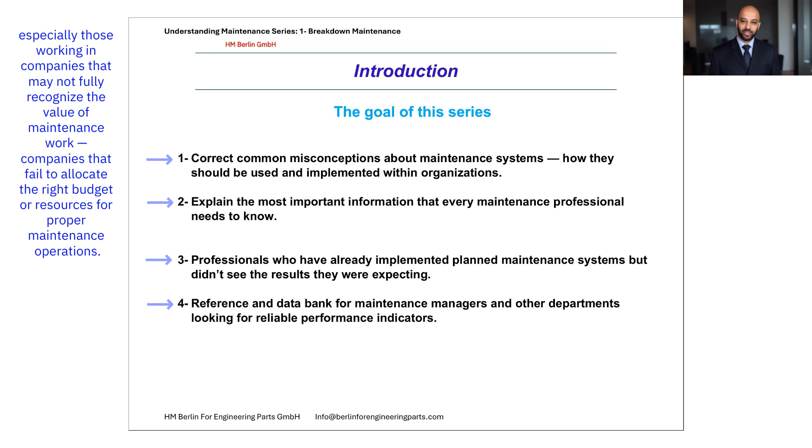This series is also designed for professionals who have already implemented planned maintenance systems but didn't see the results they were expecting, whether in terms of equipment performance, technical KPIs, or in terms of cost reduction, financial KPIs. Finally, this series will serve as a reference and data bank for maintenance managers and other departments looking for reliable performance indicators to measure and compare their actual maintenance results, and use that data to drive real improvement.

Now, let's take a closer look at the definition of breakdown maintenance, a term that many people use but often misunderstand. Definition 1. The practical perspective. A simple and practical definition of breakdown maintenance is this: it's the work you're doing today that you didn't plan to do at least a week ago. In other words, it's unexpected. Something broke down and now you're forced to fix it, whether you like it or not.

Definition 2. The operational view. Breakdown maintenance can also be defined as all maintenance activities that are not scheduled in advance and are only performed when equipment fails. This includes emergency repairs, urgent part replacements, and any unplanned interventions triggered by equipment failure. Definition 3. The technical description. From a technical standpoint, breakdown maintenance is maintenance that is carried out on equipment that has stopped working, experienced a fault, or can no longer operate within its expected limits. In short, the machine is down, and the goal now is to get it back up and running as fast as possible.

Summary. While the wording may vary, all these definitions point to the same core idea: breakdown maintenance is reactive. It happens after something goes wrong, and it often leads to high costs, production delays, and stress on both the equipment and the maintenance team. That's why it's important to understand it deeply, measure its impact, and, when possible, reduce our dependence on it.

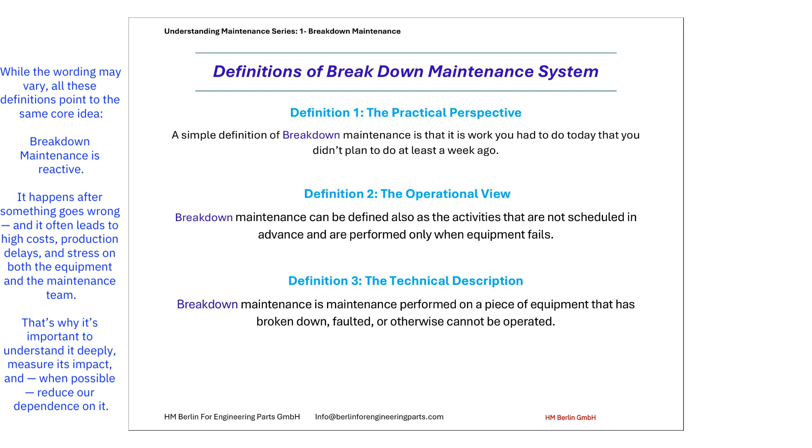In the previous episode, we explained that maintenance systems are generally divided into two main categories: planned maintenance system and unplanned maintenance system. As we explained, the unplanned maintenance system is referred to as breakdown maintenance system, although it has several names that differ according to the classification of the type of part, whether mechanical or electrical, and the country and organization, as we will review them all in this episode.

Now, when we say maintenance system, it means that there are tasks, execution methods, and performance standards, even for unplanned maintenance system. Unfortunately, many people wrongly assume that unplanned maintenance simply means that the maintenance team will be waiting until a part or asset fails and then fixing it. That is not accurate. Before we correct that misunderstanding, let's first highlight a few key points about why unplanned maintenance system is important. 1. It is the foundation of all planned maintenance systems. Without first improving how unplanned maintenance is managed, no maintenance manager will ever be able to achieve the full potential of planned systems, especially in terms of equipment efficiency or technical performance.

This is one of the biggest challenges maintenance departments face when trying to improve their preventive maintenance results. 2. Based on global statistics, unplanned maintenance still accounts for 40% to 55% of total maintenance activities worldwide, even in organizations that already apply preventive maintenance systems. This shows how common and essential it still is.

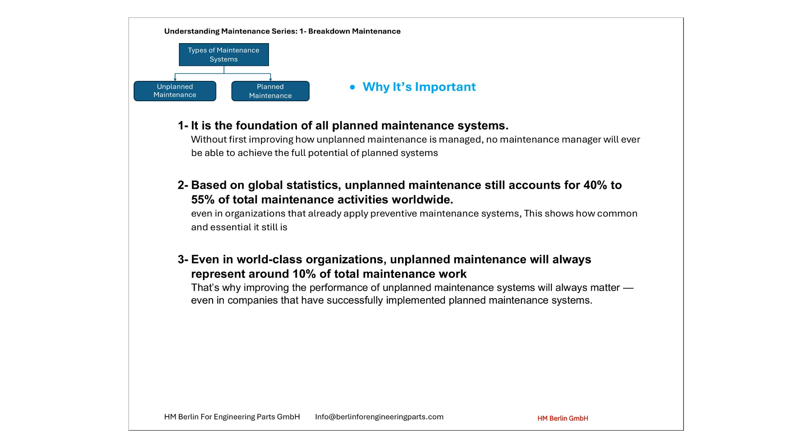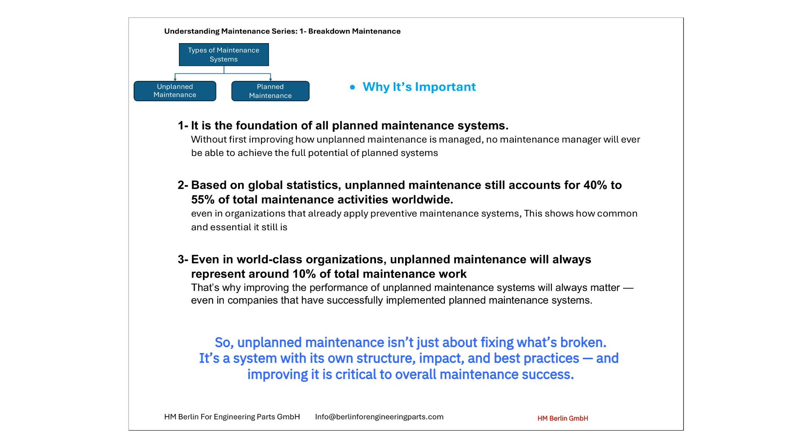3. Even in world-class organizations, unplanned maintenance will always represent around 10% of total maintenance work. That's why improving the performance of unplanned maintenance systems will always matter, even in companies that have successfully implemented planned maintenance systems. So, unplanned maintenance isn't just about fixing what's broken. It's a system with its own structure, impact, and best practices, and improving it is critical to overall maintenance success.

Now, let's talk about the different terms used for unplanned maintenance. You might hear different names depending on the industry, the company, or even the country, but they all refer to maintenance that is not planned in advance. The first term is breakdown maintenance. This happens when a machine or system suddenly stops working, and we only fix it after it breaks down. It's the most basic form of unplanned maintenance, and often the most disruptive.

Second term is run to failure, RTF. This is a strategy where we intentionally allow a machine to run until it completely fails. It sounds risky, but it's sometimes used for non-critical equipment where the cost of planning maintenance is higher than just fixing it when it breaks, and in the electrical parts that consist of electronic parts, which will be explained in the next episodes with proactive maintenance.

The third term is reactive maintenance. This term is used when we respond after a failure happens. It's like calling the mechanic only when your car stops on the road, no prevention, just reaction.

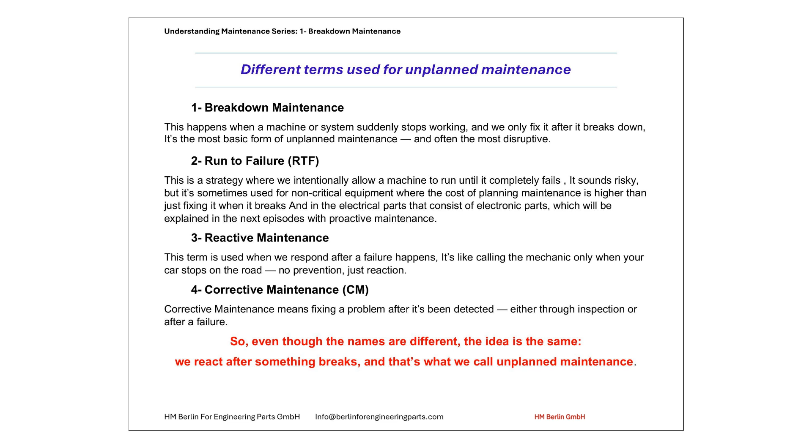Fourth term is corrective maintenance, CM. Corrective maintenance means fixing a problem after it's been detected, either through inspection or after a failure. It can be planned or unplanned, depending on how early we catch the issue. But in many cases, especially in small factories, it's done only after something goes wrong, which makes it unplanned. So, even though the names are different, the idea is the same. We react after something breaks, and that's what we call unplanned maintenance.

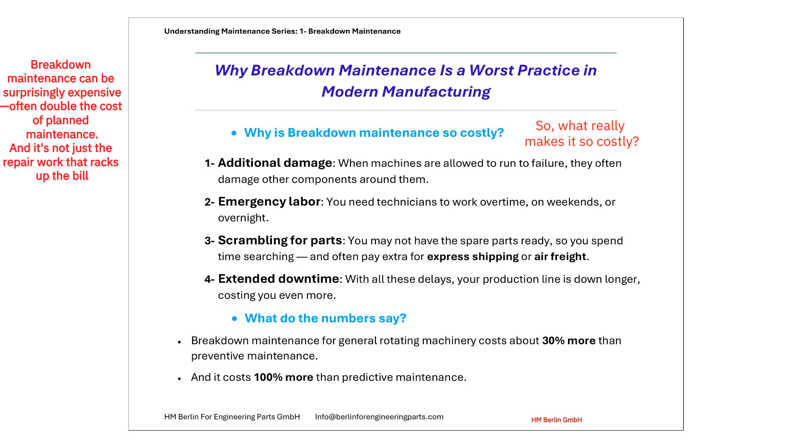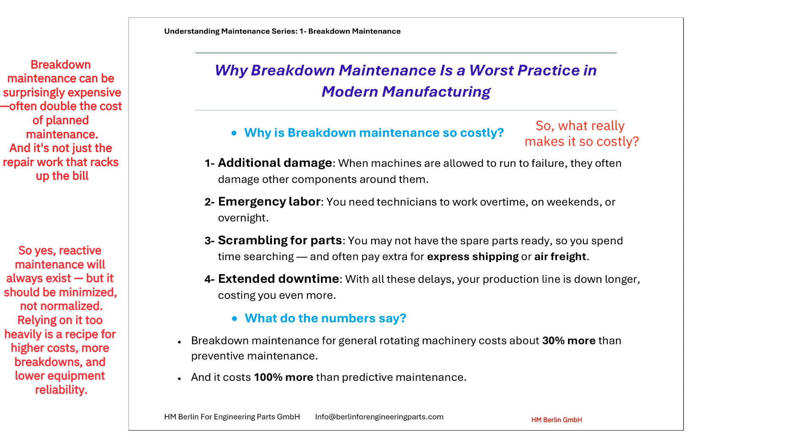What do the numbers say? Based on practical experience and international studies, one reactive maintenance for general rotating machinery costs about 30% more than preventive maintenance. 2. And it costs 100% more than predictive maintenance. So yes, reactive maintenance will always exist, but it should be minimized, not normalized. Relying on it too heavily is a recipe for higher costs, more breakdowns, and lower equipment reliability.

How much of your maintenance is unplanned? Now let me ask you a direct question.

What percentage of your maintenance work is unplanned in your organization? Take a moment to think about it. Are your maintenance activities mostly planned in advance? Or is your team constantly reacting to failures, breakdowns, and emergencies?

If more than 20 to 30% of your maintenance is unplanned, you're likely operating in a reactive mode. And as we've already discussed, that's costly and unsustainable in the long run. So how do you know exactly where you stand? In the next paragraph, we will learn how to calculate the percentage of unplanned maintenance.

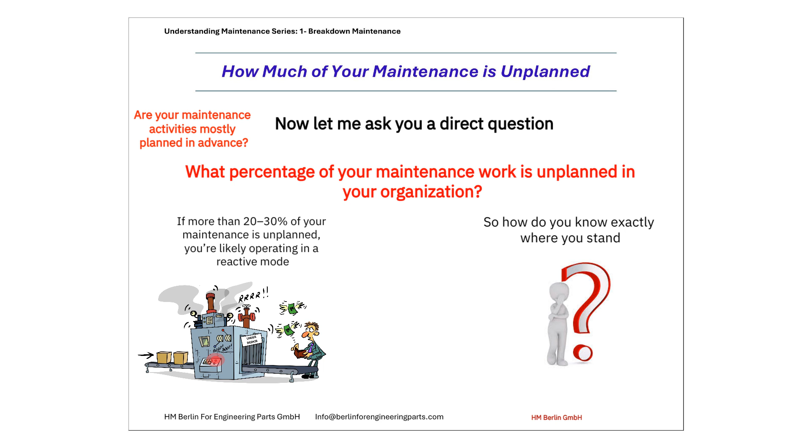Now let's calculate it. As we agreed, any maintenance task performed today that was not scheduled at least 1 week ago is considered unplanned maintenance. This definition gives you a clear line between planned and unplanned work, and it's practical, measurable, and actionable.

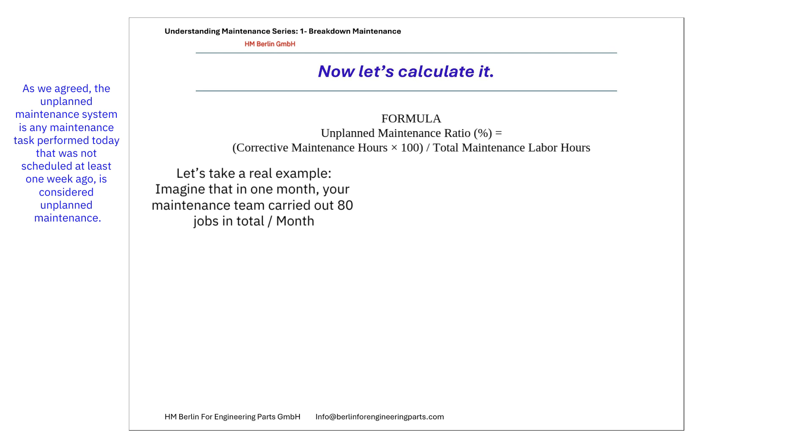Here's a simple formula you can use. Unplanned maintenance ratio % equals corrective maintenance hours times 100 divided by total maintenance hours. Let's take a real example. Imagine that in 1 month, your maintenance team carried out 80 jobs in total. Out of these, 30 were unplanned, meaning they were not scheduled at least 1 week in advance.

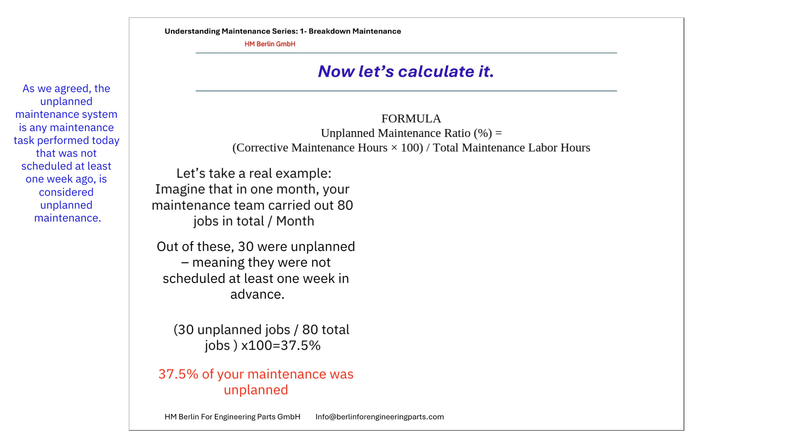Now plug that into the formula. 30 unplanned jobs divided by 80 total jobs, multiplied by 100, equals 37.5%. That means 37.5% of your maintenance was unplanned, and that's higher than the recommended range.

According to best practices from leading global manufacturers, your unplanned maintenance rate should ideally be under 10%. Above 30%, you're definitely in the red zone. But don't worry, you are not alone. Did you know that most organizations, based on statistics, suffer from an increase in the rate of unplanned maintenance?

Conclusion. So, if you're not already tracking your unplanned maintenance ratio, start today, because you can't improve what you don't measure. Why is your unplanned maintenance rate so high? Causes behind reactive maintenance dominance.

Let's now talk about a critical question. Why is the percentage of unplanned maintenance still high in many organizations, far beyond global benchmarks? Well, in most cases, the reasons are actually beyond the control of the maintenance manager. Many maintenance leaders find themselves stuck between two forces.

1. Upper management that doesn't approve budgets for preventive tasks, inspections, or routine overhauls. 2. And production departments that won't release machines for planned maintenance at the right time.

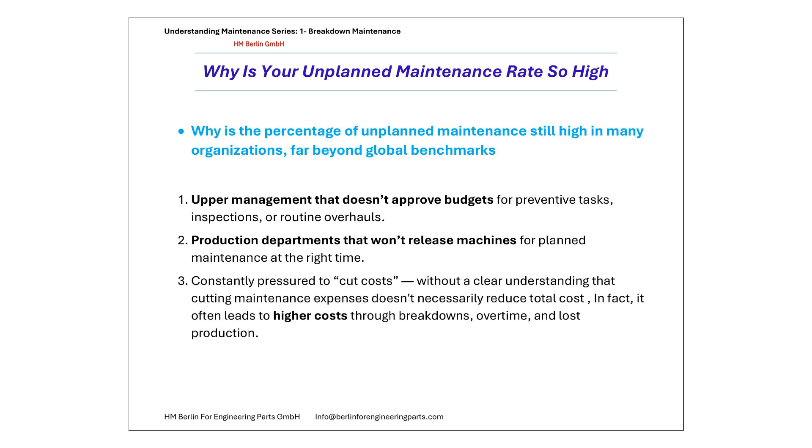3. At the same time, these managers are constantly pressured to cut costs, without a clear understanding that cutting maintenance expenses doesn't necessarily reduce total cost. In fact, it often leads to higher costs through breakdowns, overtime, and lost production.

Common challenges maintenance teams face. 1. Lack of awareness at the executive level of the real financial losses caused by equipment breakdowns. 2. Inability of production planners to allocate dedicated downtime windows for inspections or preventive maintenance.

3. Use of cheap spare parts based on the false assumption that this will reduce maintenance costs, while in fact, it often causes repeat failures and more unplanned downtime.

4. Upper management prioritizing short-term savings over long-term reliability, always choosing to delay or cancel preventive work to save money, not realizing this usually increases total cost through reactive work and system inefficiencies. 5. Frequent breakdowns caused by poor operating practices, such as misuse or overloading of equipment by production staff.

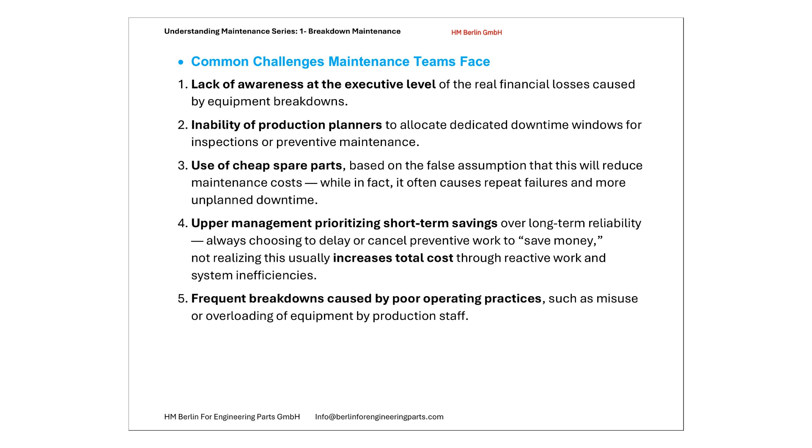The result: even the most experienced maintenance professionals struggle to implement effective preventive strategies, not because they lack knowledge or skills, but because the system around them is not enabling success. So if you're a maintenance leader, remember, success depends not only on what you do, but also on how your organization supports what you do.

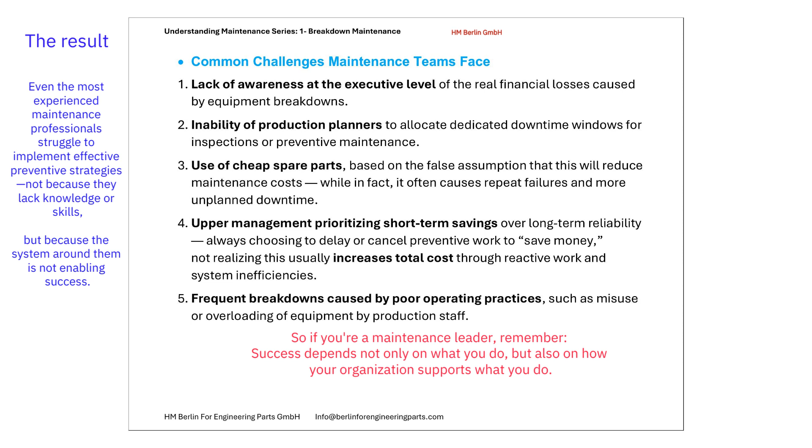So, your unplanned maintenance is too high. Now what? All right. So now you've done the math. You've calculated your unplanned maintenance percentage, and it turned out to be much higher than the global average, whether it's 40%, 50%, or even more. You're definitely not alone. Many maintenance departments across industries face the same challenge.

Now you might be wondering, is it even possible to eliminate unplanned maintenance? If you cannot access the preventive maintenance system, the honest answer: no, but I will tell you how to improve your team performance. In fact, even in world-class plants, unplanned maintenance still makes up around 10% of total maintenance activity.

So the real question isn't how to get rid of it. The question is, how can you improve the way you manage it? That's what we're going to focus on.

In the next part, I'll walk you through how to improve your unplanned maintenance, starting with enhancing one key performance indicator that will help you reduce response times and streamline your internal processes. These aren't just concepts. They are proven practices I've seen work on the ground, and they can help you too.

Understanding MTTR and MTBF in maintenance performance. In any industrial maintenance system, two key performance indicators help assess equipment reliability and the effectiveness of the maintenance strategy: MTTR, mean time to repair, and MTBF, mean time between failures. MTTR is the average time required to diagnose, repair, and return equipment to operational condition after a failure. A lower MTTR means faster recovery from breakdowns, which helps reduce downtime and maintain production flow.

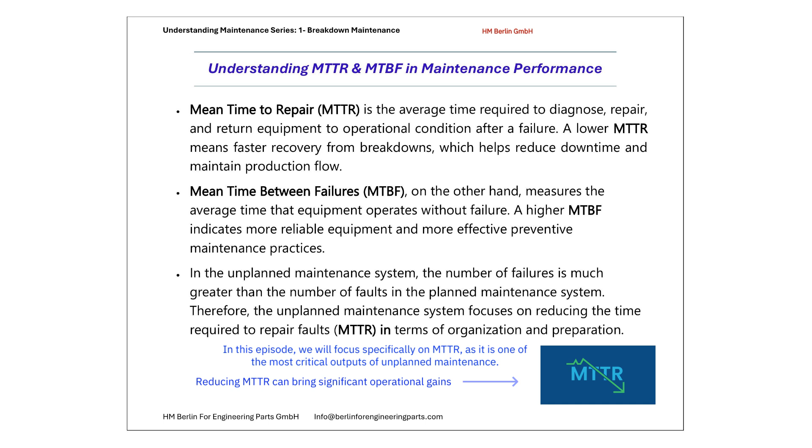In this episode, we will focus specifically on MTTR, as it is one of the most critical outputs of unplanned maintenance. Reducing MTTR can bring significant operational gains. Even if failures can't be entirely avoided, a fast and efficient response can keep the production line moving. Together, MTTR and MTBF provide a powerful insight into both equipment health and maintenance team performance, and improving these numbers is the foundation of any high-performing maintenance strategy.

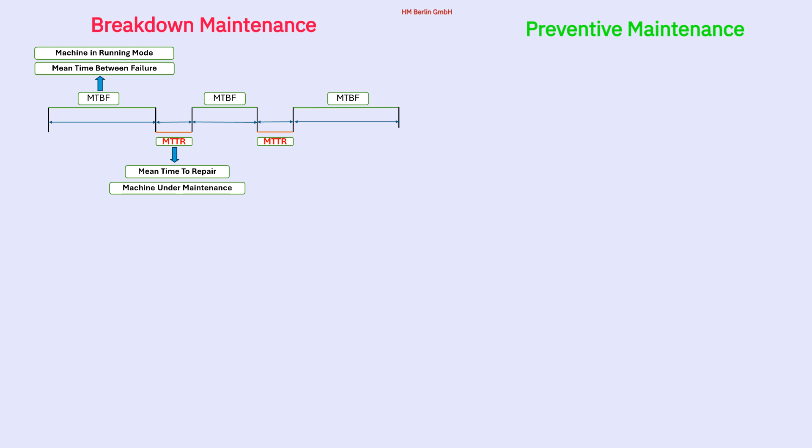Here I am showing two charts that compare two different maintenance strategies: breakdown maintenance versus preventive maintenance. In the first chart, which represents unplanned or reactive maintenance, we can see that the number of breakdowns is high. This means the MTTR, mean time to repair, is also high because the machines stop frequently and take time to repair. At the same time, the MTBF, mean time between failures, is low because the time between each failure is short. It's like a heart monitor showing irregular and weak pulses. The system is unstable.

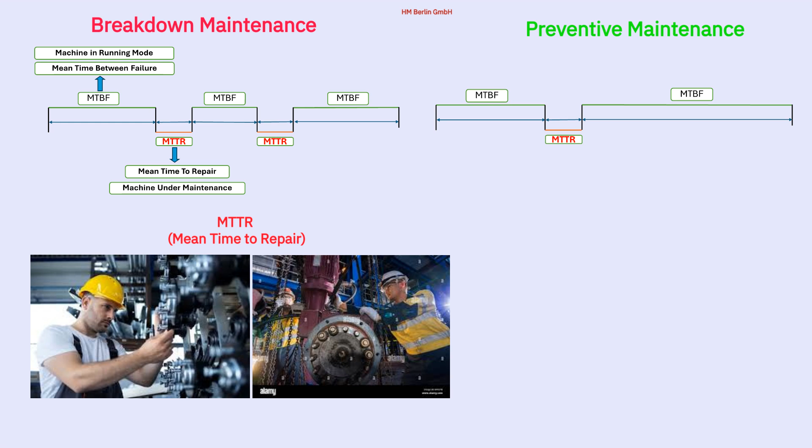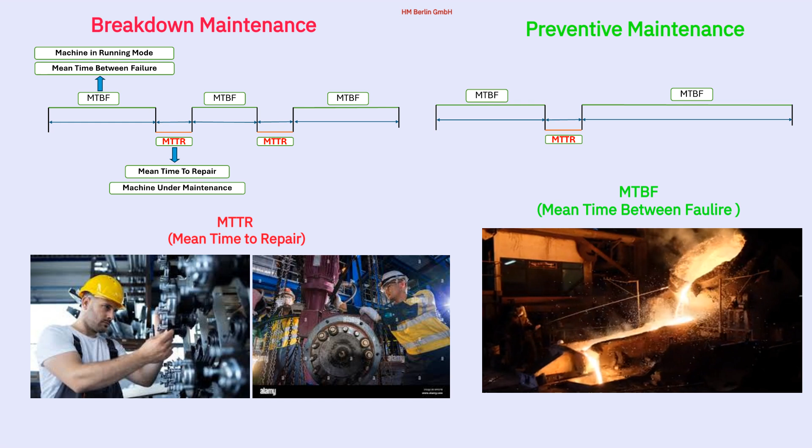In the second chart, which represents a preventive maintenance system, the breakdowns are fewer. This results in a lower MTTR and a higher MTBF, meaning the machines run for longer periods without failure. The system is more stable, like a steady and healthy heartbeat. So the goal is clear. By shifting from unplanned maintenance to preventive maintenance, we can increase machine uptime, reduce downtime, and improve overall production stability.

How to improve unplanned maintenance performance: real-world practices. Now let's talk about real solutions. If your unplanned maintenance rate is too high, you might not be able to eliminate it, but you can make it faster, more efficient, and smarter. Based on real factory floor experience, here are practical steps you can apply immediately.

1. Emergency toolkit ready and mobile. One of the biggest time wasters during breakdowns: technicians running around looking for the right tools. Solution: keep a pre-packed, mobile emergency toolkit with all standard tools, testers, etc. Check it daily. Assign responsibility. Make it non-negotiable.

2. Track recurring failures. Act on the data. Look at your breakdown history over the past 3 to 6 months. What's coming up again and again? Once identified, train your team to diagnose and repair these quickly. Even better, prepare checklists and spare part kits just for them.

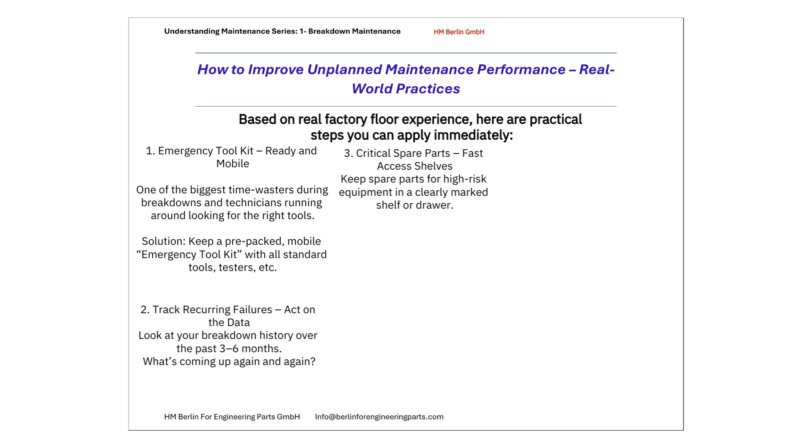3. Critical spare parts, fast access shelves. Keep spare parts for high-risk equipment in a clearly marked shelf or drawer. Use color codes if needed. No more searching, no more store delays.

4. Rapid notification channels. Don't rely on slow paper work orders for emergencies. Set up a WhatsApp group, radio channel, or even a Google form for instant fault reporting. Simple beats perfect. Speed matters more.

5. Pre-assigned roles during each shift. Each shift should have a clearly assigned first responder, the technician who jumps on the issue immediately. Others follow with tools, parts, or assist. No confusion. No debates. Just action.

6. Stronger coordination with production. Many delays happen because the maintenance team can't get access to the machine.

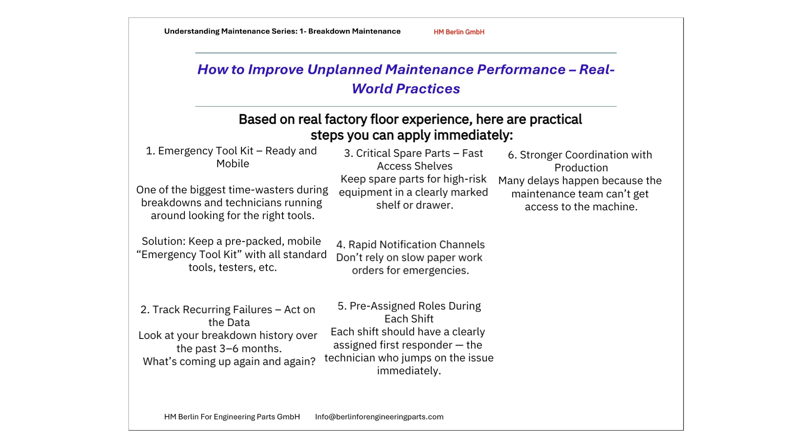Set a clear protocol with production. When a fault is reported, the equipment must be handed over quickly and safely, even if it means minor production delay.

7. Document every breakdown and review weekly. After every repair, document what happened, even in bullet points. Then spend 15 minutes each week as a team reviewing the top 3 breakdowns. What went wrong? What could have been done faster? It builds team awareness and skill. One factory I worked with saved 17% of their average MTTR using this simple practice.

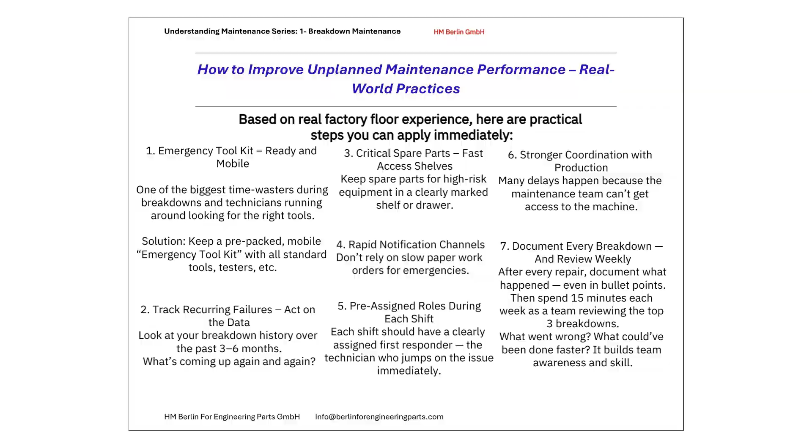Remember, the purpose of any maintenance system, old or modern, is to increase uptime and reduce repair time. And while planned maintenance is ideal, unplanned maintenance will always exist. Now that we've explained MTTR, MTBF, and discussed the 7 key points to reduce repair time, let's see how these same principles transformed one of the fastest-paced industries in the world, Formula One.

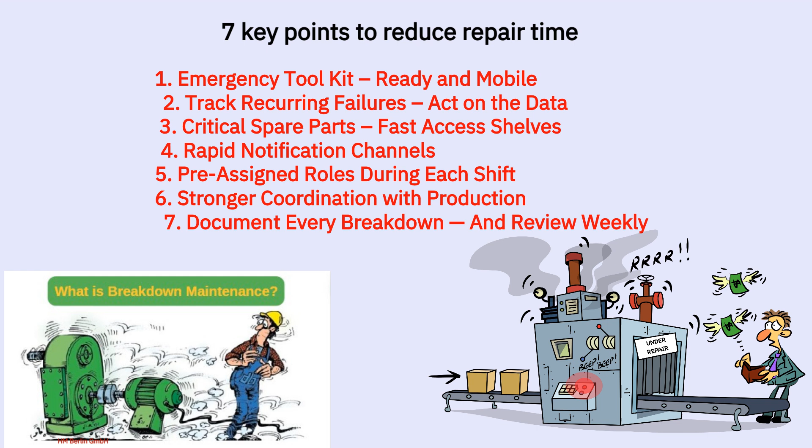Let's look at this real-life example from Formula One. What you're seeing here is a pit stop. The team is changing the car's tires in just a few seconds during a live race. In this video, we'll explore how reducing repair time, MTTR, isn't just about speed, it's about structure. You're now watching the evolution of Formula One pit stops, a real-world example of how planning and teamwork reduce downtime.

In 1957, a tire change could take over 60 seconds. By the 1980s, it dropped to about 25 seconds. In the 1990s, it fell again, around 8 seconds. By 2000, pit crews brought it down to under 4 seconds. Today, top teams complete a full tire change in under 2.5 seconds. This wasn't magic, it was process.

What changed over time was toolkits became optimized and mobile tasks were tracked and reviewed after every race. Spare parts were ready and accessible. Instant communication systems were used. Team members had clearly assigned roles. And everyone practiced, again and again. The same 7 principles you just saw.

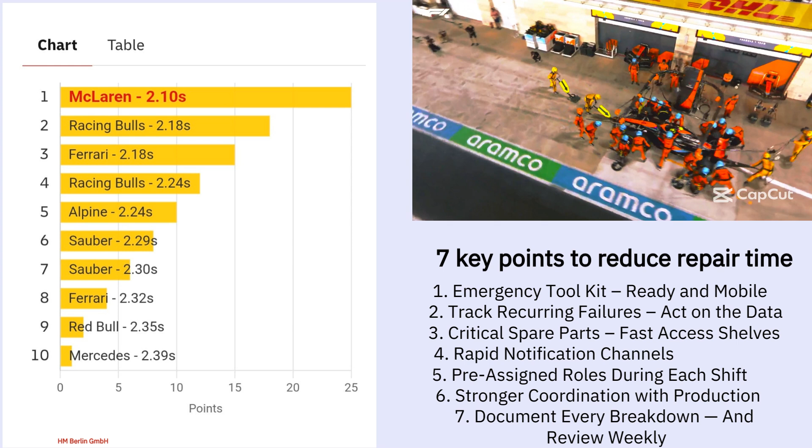This is not random. It's the result of extreme preparation, clear role assignment, tools ready in place, standard procedures, and perfect team coordination, exactly the same principles we discuss. In maintenance, we may not work on a racing track, but the concept is the same. If we want to reduce MTTR, we need to act like a Formula One pit crew.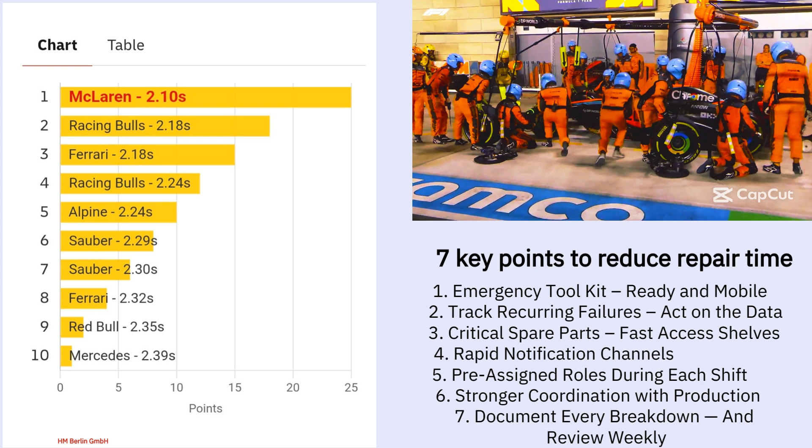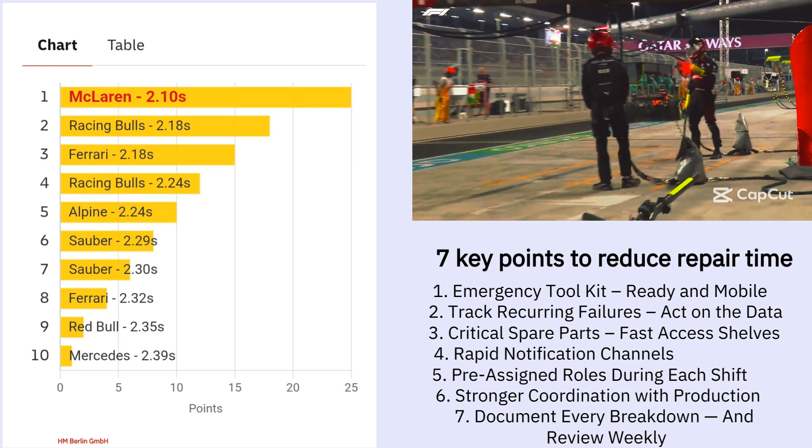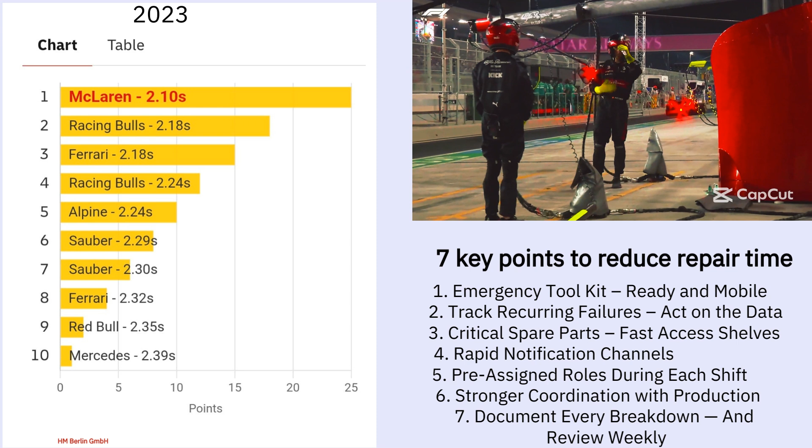Everything must be ready before the failure happens. Everyone must know what to do without delay. That's how you win races in Formula One, and that's how you win time and money in production. In both Formula One and factory maintenance, every second counts. A fast, organized response reduces downtime, saves money, and sets top-performing teams apart from the rest.

In conclusion, I would like to emphasize the following points. 1. Unplanned maintenance is a system in which the maintenance department is responsible for reducing repair time by developing plans, rather than waiting for breakdowns to occur, as is commonly believed. 2. Planned maintenance systems will remain in place regardless of the level of maintenance implemented by organizations.

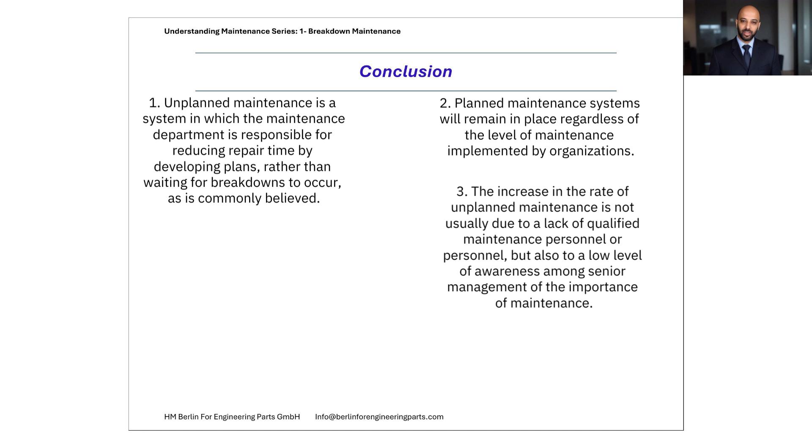3. The increase in the rate of unplanned maintenance is not usually due to a lack of qualified maintenance personnel, but also to a low level of awareness among senior management of the importance of maintenance. 4. Maintenance performance efficiency can be increased by implementing unplanned maintenance objectives that reduce repair time.

To wrap up this episode, I want to emphasize one key message. Breakdown maintenance is not a weak or outdated system. On the contrary, it's a fundamental part of maintenance history, and it still plays a critical role today. In this episode, we've seen how we can improve the performance of breakdown maintenance, not by eliminating it, but by reducing the mean time to repair (MTTR). We discussed how MTTR is not just a number, but a powerful performance indicator that helps us measure, monitor, and improve our response to failures.

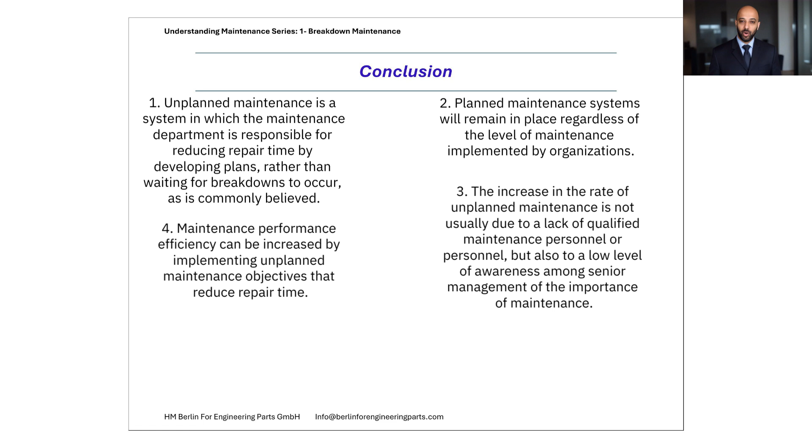This episode is especially dedicated to two types of maintenance managers: those working in organizations that are not yet ready to implement preventive maintenance systems, and those who already apply preventive maintenance but may overlook the continued importance of reactive or breakdown maintenance. Thanks for watching and stay tuned.